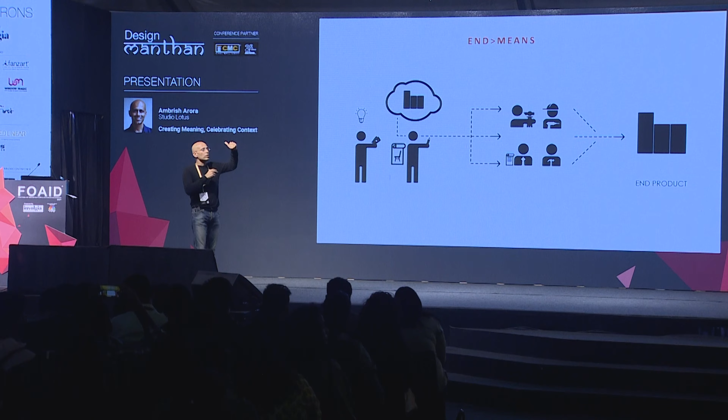I mean, that's what we are taught, and that's the idea of modernism or postmodernism. But if we really want to harness what we have in this country, we need a process where the means become more important than the end. We always hold ourselves back asking, is the way it will get done appropriate to what we are doing? That brings us to what we call an evolutionary model.

We create a framework, like the one I shared with you, asking what does this project aspire to do, how does it aspire to do it, what is it addressing, and then share that as a value amongst all the stakeholders—whether it's the client funding the project—and infuse it with ecological, cultural, and social values, making sure the end result for the client is addressed in a much richer way, because the knowledge harnessed is not ours alone. It's a collective repository.

So what you are then is not an author of the design, but a facilitator, an orchestrator, making sure that all that immense talent out there is harnessed to deliver what's most appropriate for the project. This results in a project that's much more inclusive, delivering an emotion and a learning that transcends your own—and that itself is a reward you get at the end of it.

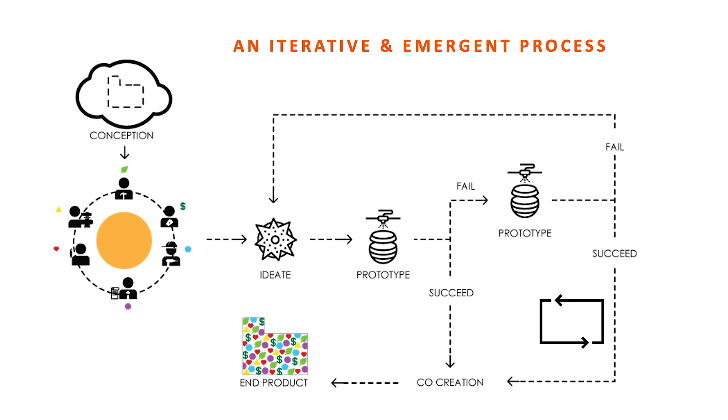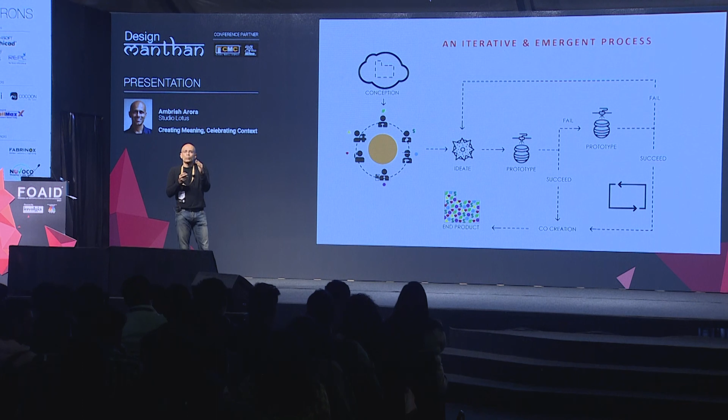And you have to work harder, no question. You have to prototype, ideate, test it, come back. That's one of the things we're struggling with at the studio right now—you get paid the same fee, but how do you include all of this as part of the process? So we have to work twice as hard to get to where we are, but the product at the end is much more rewarding. Hence we look at ourselves as one of many possible change makers in the industry.

I'm going to talk about two case studies. These are projects I've not shared before, and they were also shortlisted for the World Architecture Festival finals. In fact, one of them won the building category just a couple of days ago.

Both of these, oddly enough, have the same set of collaborators. So what I'm really sharing is a collective effort of the structural engineer Manjunath, a brilliant man; Akshay Kaul, the landscape architect, who we worked with for several years; Mangrove Collective, who does furniture for us for both these projects; Buildcraft, the contractor, who took on the challenge of doing something like this because it was extremely challenging; and last but not least, the fantastic set of colleagues I have at the studio.

This first project has been a journey of watching nature heal the land as much as us building a home. Situated between Bhimtal and Mukteshwar in the Kumaon region of Uttarakhand, the site is at a height of 2,000 meters above sea level and rises through an elevation of 400 meters over an incline of 1 kilometer, with slopes varying between 25 to 40 degrees.

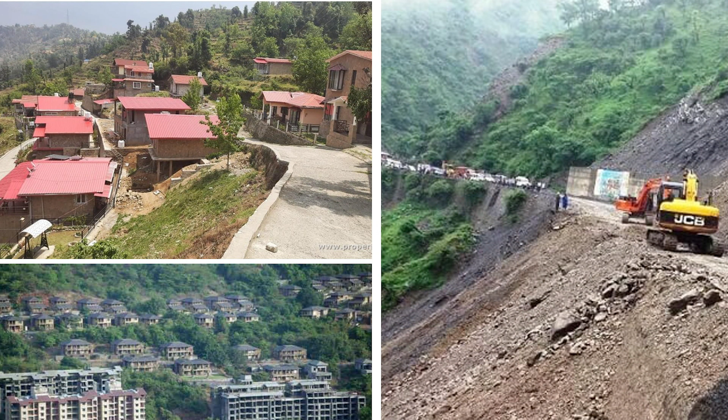We all know a lot of people are now looking for second homes in the hills around Delhi, and this has led to massive, rampant, insensitive construction by private developers—partly because there are no codes in rural areas and because they're looking to make a quick buck. The region has abundant rainfall, but the breakdown of old rainwater catchment systems has led to a scarcity of water, which is true of most parts of the country.

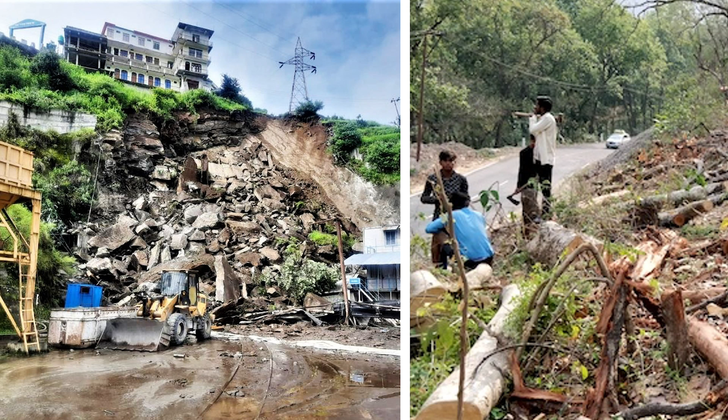Destabilization of slopes and destruction of green cover makes it increasingly prone to landslides, as we've just recently seen in the past few years. So when a client approached us to do a luxury hillside development, we were wary of taking it on.

Initially we pushed back, not sure what he wanted to do. But over several meetings, we found he shared our values and vision. We set out almost like a charter, asking: can we give back to the land as much as we take from it? That sounds oxymoronic since you're building on it, but the land hadn't been taken care of well, and that gave us an opportunity to build in a way that treads lightly on the ground and perhaps even enriches the ecosystem.

For the master planning exercise, we worked closely with Akshay. First we mapped out the slopes and surface drainage patterns, critical on hillsides, the natural flow of water, and the vegetation. At the intersection of these three, we figured out which areas we could build on without impeding any of them. We laid out a network of roads responsive to the terrain, and came up with a master plan of only 70 homes on 88 acres with ground coverage of less than 5%.

How did we make it financially viable? One way was making buyers pay for the common amenities. We developed a community-like approach where many amenities, instead of being built into the homes, were built into common areas. There are no boundary walls; there's free access across the whole 88 acres. So everyone, when they buy a home, experiences buying into the 88-acre experience, and that allows the development to pay for keeping this sparse approach.

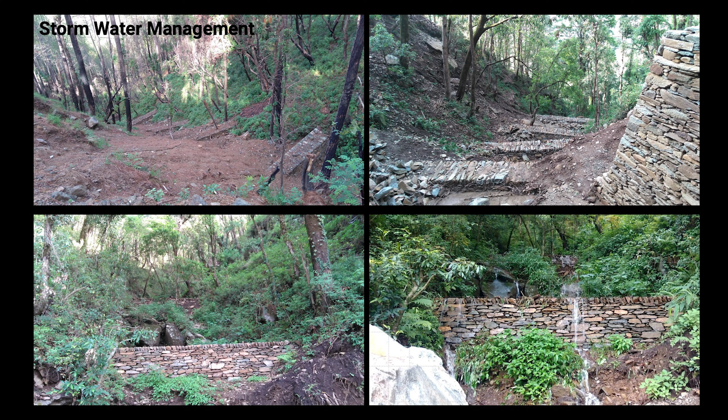We created a goal of being net surplus on water requirements, a first in that region. For the first two years, the client agreed to work only on ecological regeneration of the site. Even before the first house construction started, we worked on reducing surface runoff and minimizing soil erosion through a network of check dams and gully plugs, all dry stone, no cement used. More than 300 of these have been finished so far. Within just three seasons of rainfall, water levels in shallow wells on site and in villages downstream have come up more than in the last 20 years. That's been immensely rewarding.

Usually when a developer builds, it disrupts the surrounding rural ecosystem and networks. In this case, the villages have come up and supported this because it's added value to their communities.

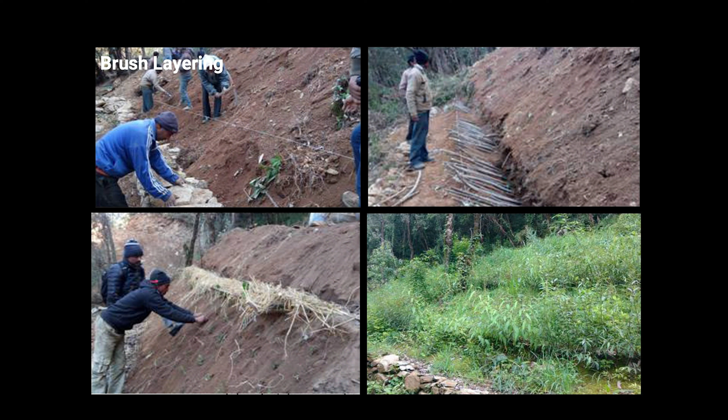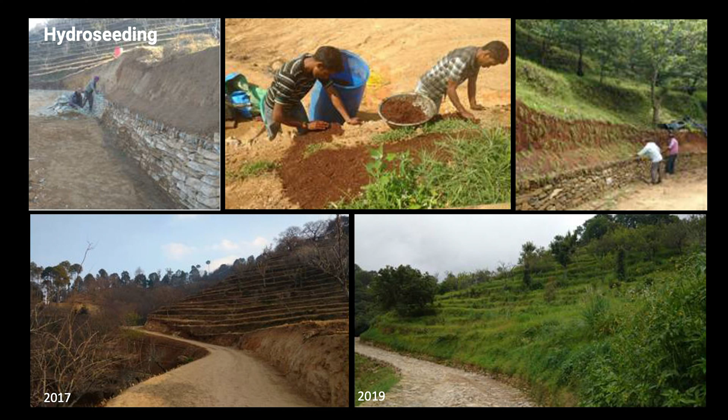To prevent soil erosion and stabilize the site, we moved away from building large concrete retaining walls. With Akshay and Dr. Madhusudan from Nepal, we created bioengineering techniques such as brush layering and hydro seeding. Those are before and after pictures you can see over the two years.

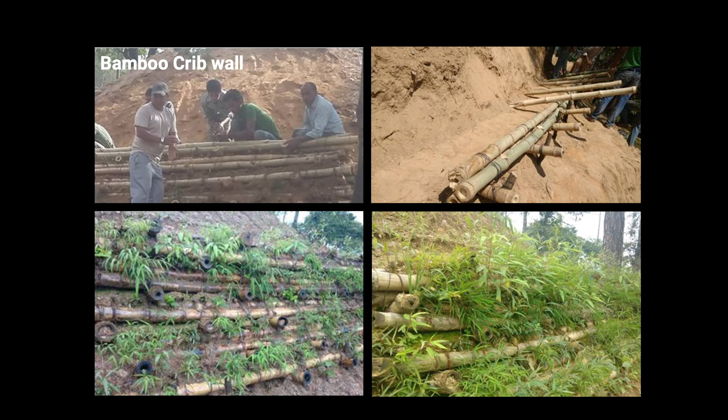We also used bamboo crib walls, where live bamboo is planted along with woven bamboo to generate retaining for the hillside, along with infrastructure and a lot of reforestation—thousands of native trees such as oak and rhododendron, along with native shrubs and trees that don't require irrigation.

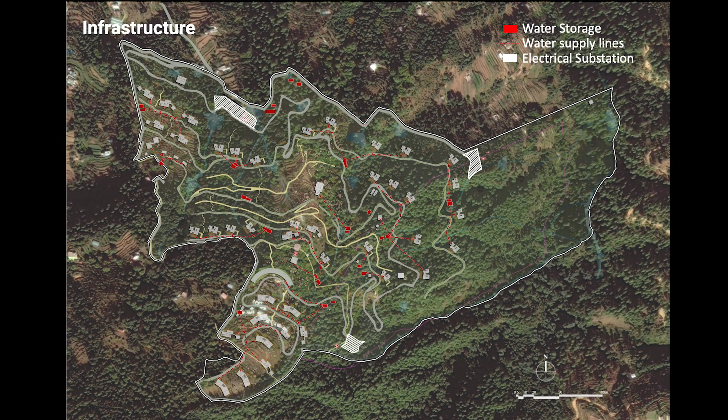Infrastructure is being planned as a distributed hub and spoke network. Rainwater runoff from the roof is collected and supplied through a gravity-fed network, so nobody owns the water—if I collect water in my house, my tank supplies water to your house. We use gravity, and we have about 30 lakh liters of captive rainfall on site at any given point in time. That's what we're designing for.

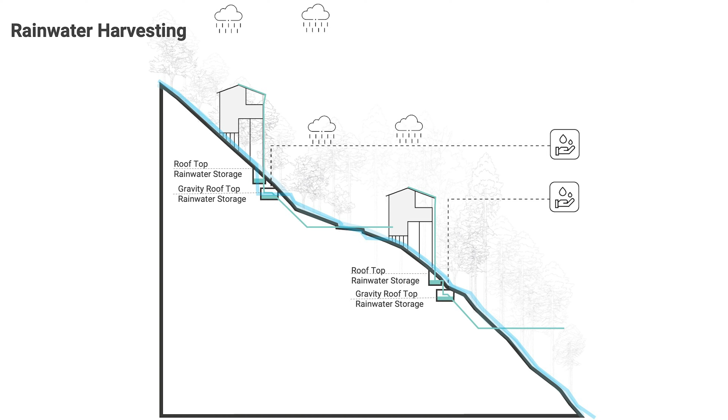The home I'm going to show you now—and of course we've also got biodigesters for 100% of the wastewater to be recycled and reused in a dual plumbing system.

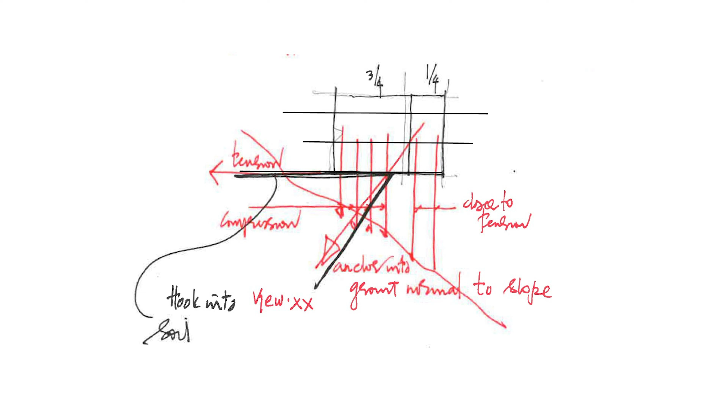The first home was built in a clearing on a slope of 40 degrees, which by traditional methods the local contractor said you couldn't build on. We chose this slope because the more buildable sites in conventional terms were good for farming, orchards, and forest. The framework was conceptualized by the very clever Manjunath. It mimics the structure of trees, with a narrow base that lightens and spreads as it moves up. It's built over 3 levels, a vertical construction to reduce the footprint on the ground, save the trees, maximize views, and the stilts allow water to continue flowing under the house without disrupting the flow.

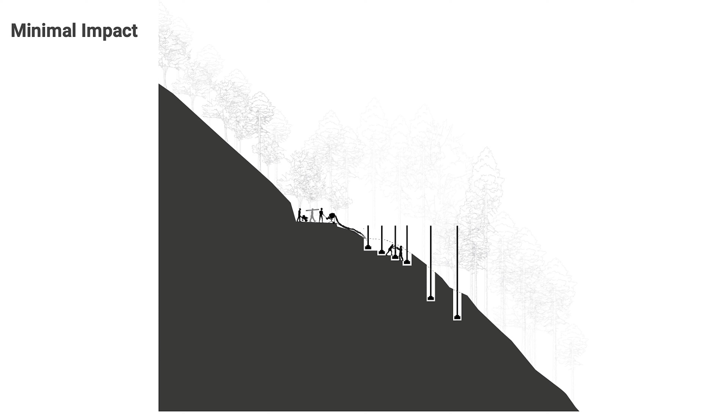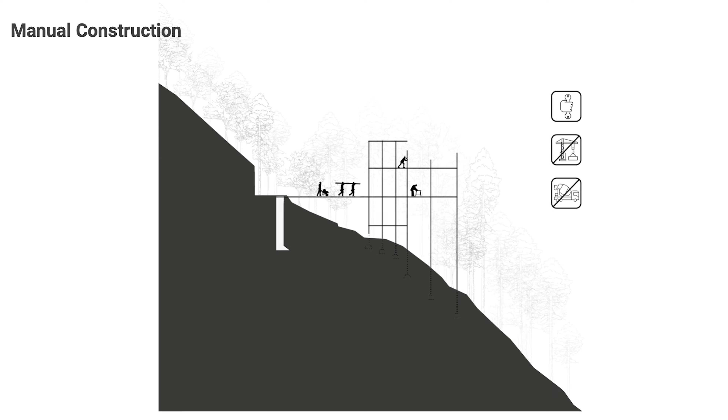Localized stepped foundations along the slope allow for minimal excavation, almost no cut and fill. One of the mandates we set was that we would not bring heavy machinery to site, because setting up a heavy crane and moving girders and material kills the entire site and the trees around.

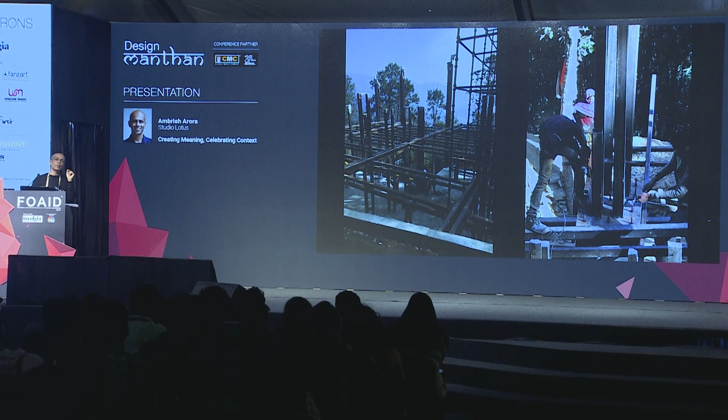So the structure is designed as a basket-like weave of lightweight steel tubes, and each member has been designed so that 3 to 4 people can manually carry it and assemble it. It's like a little Lego block, and you build as you go along, using the deck slabs, which are thin with only 3 inches of concrete, as scaffolding.

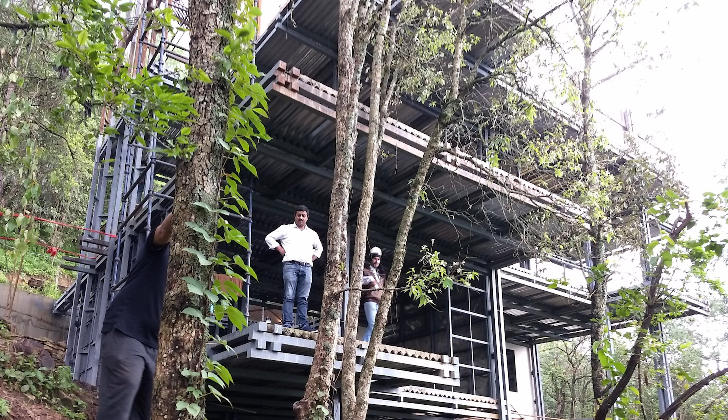The gap in the weave, a woven structure which gives it strength, allows the movement of surfaces and maximizes internal heights. The home is designed to achieve European passive house benchmarks, the first of its kind in the mountains in India.

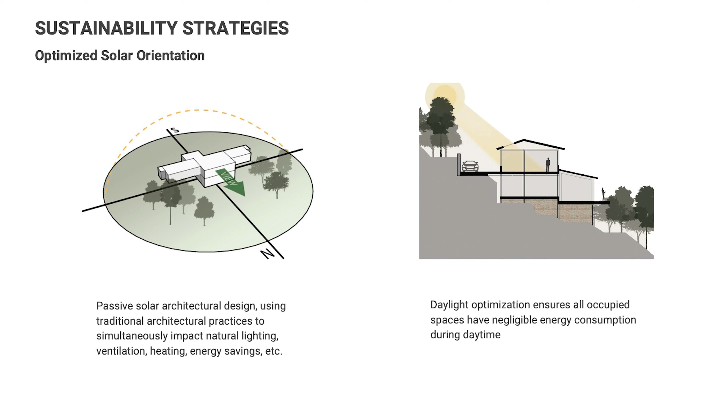Passive design techniques, studies in daylight, solar gain, etc., are obviously there, but the main thing is the construction system, where we moved away from wet work and worked with dry construction techniques with insulated, multi-layered walls, which keep the U values at almost one-third that of stone walls, bringing energy requirements down to less than 50% of a regular old-fashioned stone cottage, reducing heating energy and loads.

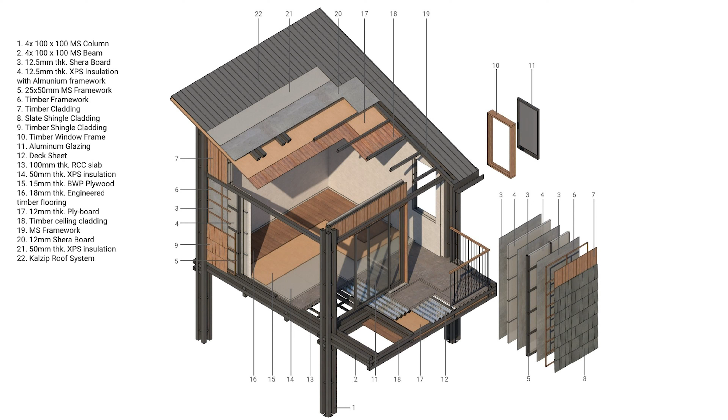The material palette builds on the vocabulary of the Kumaoni vernacular. We have forest certified timber and slate shingles weaving through this metal structure to form an external rain screen.

The interiors combine the client's earlier pieces from his previous home with new pieces that build a regional narrative through textiles. There are some classic pieces he already had, woven together with artworks we commissioned and developed using local artisans, integrating to form an eclectic palette within the relatively contemporary expression of the main house.

This ramped boardwalk leads to the main door. We know wood carving is a popular craft in Kumaoni culture, and local artisans handcrafted the timber frames, doors, and panels inside.

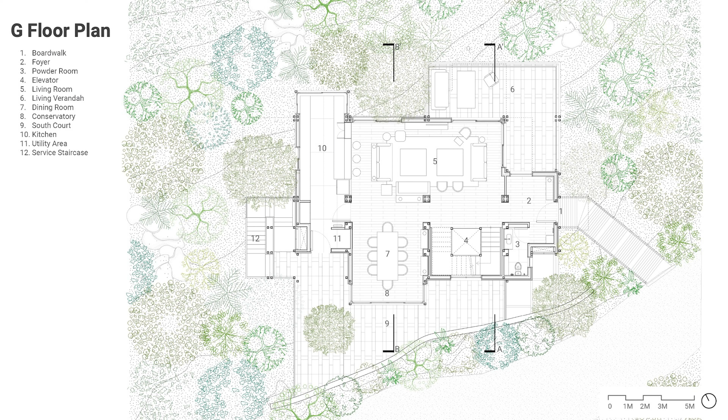The entry level consists of a foyer, a powder room, living and dining with north and south decks. The living room, to the left is the staircase connecting to the upper and lower levels, and the kitchen and utility on the west face are serviced by an independent entry and a service staircase.

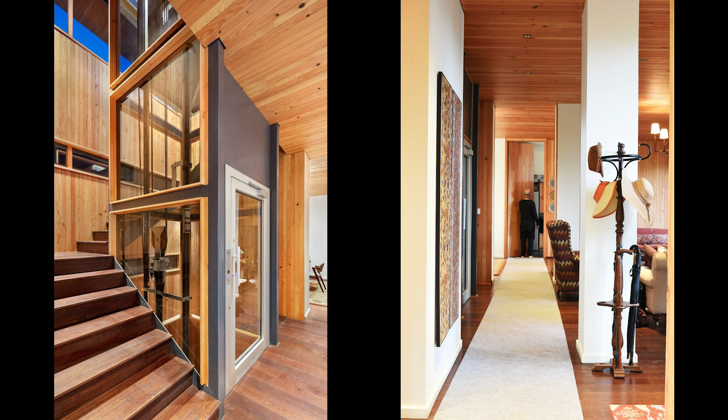What you see here is the foyer that opens up towards the elevator. We've got elevators in the house to ensure universal accessibility, so all the homes have handicapped access, something that's very rare in the hills. We've designed the siting to be such.

That's the living room, which connects to a semi-covered outside deck perched among the trees. The dining area has a conservatory structure towards the south that brings in the south sun and opens up onto the courtyard on the south.

The upper level has a den flanked by two master bedrooms, and the stairs open into this den, which has a fireplace connecting to an open-to-sky deck flanked on either side by bedrooms. Each of these bedrooms have bay windows overlooking the views that project into the forest.

Skylights with retractable blinds in all the rooms bring in the winter sun, and at night capture the intense starlit skies that one doesn't get to see in Delhi at all. The lower level has a guest suite, staff quarters, and a storage area.

The staircase opens up to the guest bedroom, which has its own deck. There's also connection to the beautiful semi-covered landscape, which leads down through a cobbled mountain path to a bamboo deck over one of the springs that has come alive post our ecological restoration.

All the services of the house, such as the MEP room and pumps, are tucked in below the floating south court, easily accessible from the service staircase.

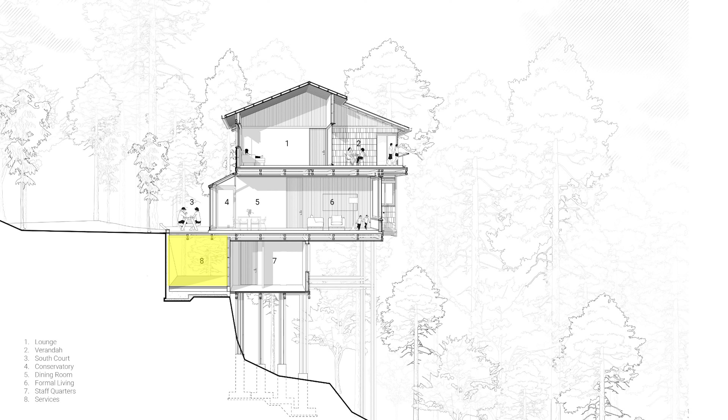The house within the forest evokes a feeling of being perched among the trees. The upper level bedrooms and deck are nestled within the tree cover. The living room at level 0, the guest bedroom at level -1 with verandas nestled within the forest.

The cantilevered projections bring the forest into the room, and the east elevation of the house finds itself gently perched on the slope. The south elevation merges into the landscape, reflecting the original intent of having the house disappear into the forest.

The second project is something we've done for clients we've worked with in the past on a couple of projects. We've been very fortunate to have a partnership with them, which allows us to continue to experiment with what hospitality in the country needs to be.

The site is set between Jaipur and Jodhpur on a dam, an oasis of 600 acres of regenerated forest by the original owners, flanked by a 150-year-old rainwater check dam. This was built by the then ruler as an irrigation reservoir, and for the third generation of his descendants had been running it as a wildlife camp since 2005.

In the 90s, they'd stopped water-intensive farming on the land and allowed it to be overtaken by native trees into a thriving forest, home to hundreds of species of migratory birds and wild animals such as deer and boar, with the occasional leopard sighting.

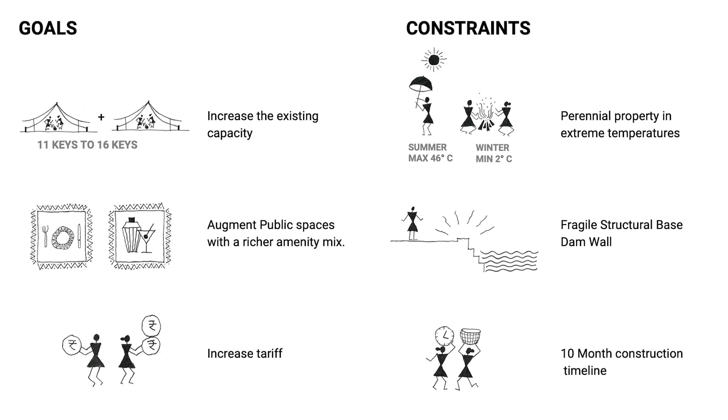Last but not least, the whole project from design to build was about 10 months, because the business plan only allowed them that.

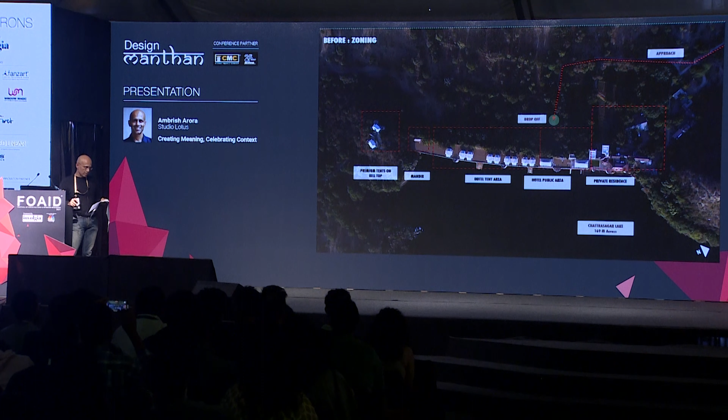The old program had circulation and services already mapped out, and for minimum disruptions, we built on the existing scheme that was there. The old structures had no privacy either from the circulation path on the dam or the open areas in front, and only offered lake views, ignoring the lush sunset forest views, using the dam as a corridor. The services were buried underground and were messy to maintain.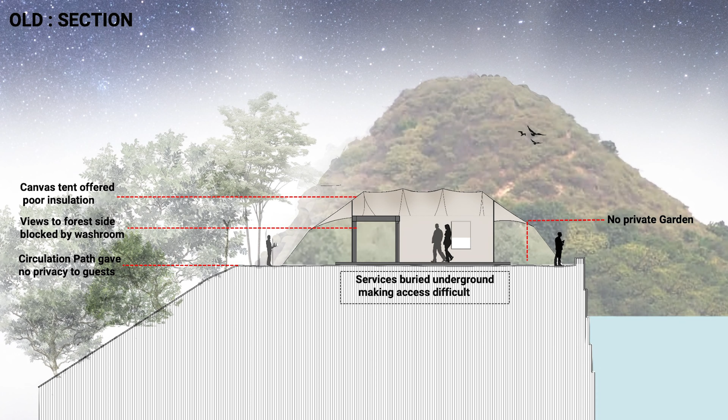Our primary move was to create tent-like, air-conditioned, insulated pods on an elevated lightweight deck with privacy screens segregating them, and a sunken circulation path on the west side facing the forest.

This allowed us to create stronger lines of sight on both sides of the tents and run services off the ground for easy maintenance. A skylight over the bed frames the intense star-studded night skies, heightened by the lack of ambient light in the remote forest.

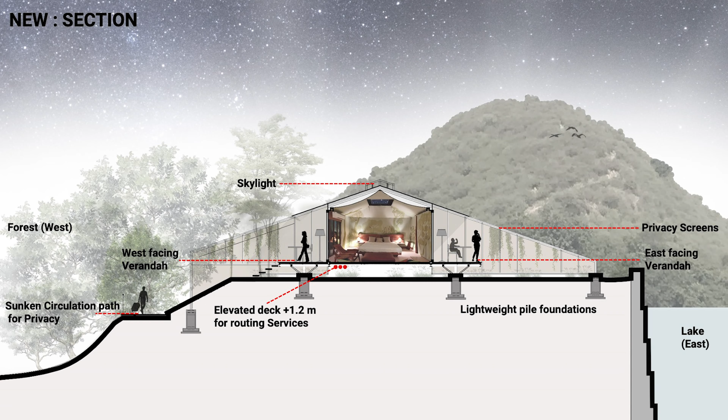The structural system works on shallow isolated piles made from hume pipes rammed with lime and waste stone. Over this, a lightweight custom-built metal structure gets bolted. Infill slabs of local Chittar sandstone form the deck and finish floor in one go, so there's no screeding, no cladding.

A double-skin drywall thermally seals the structure, and an outer covering of heat-reflecting tensile fabric on both the roof and the walls completes both the waterproofing and the tent narrative.

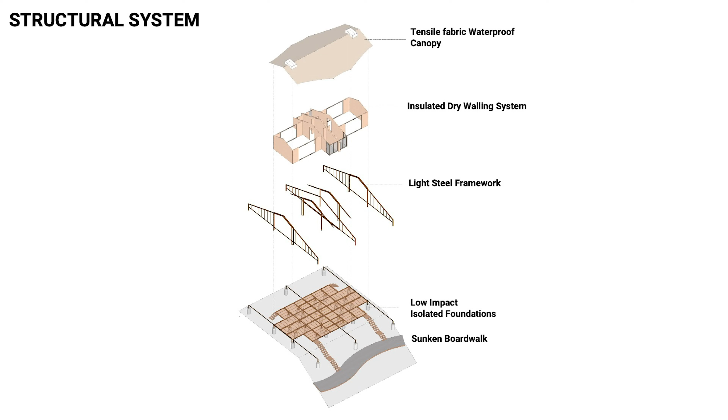The continuous line of structures elevated off the ground allowed us to maximize the number of rooms to 16, increase insulation and privacy, and ease out running all services as a single unit across the whole site without having to excavate the sensitive topsoil of the dam.

Needless to say, all the rainwater is captured and the wastewater is biologically recycled.

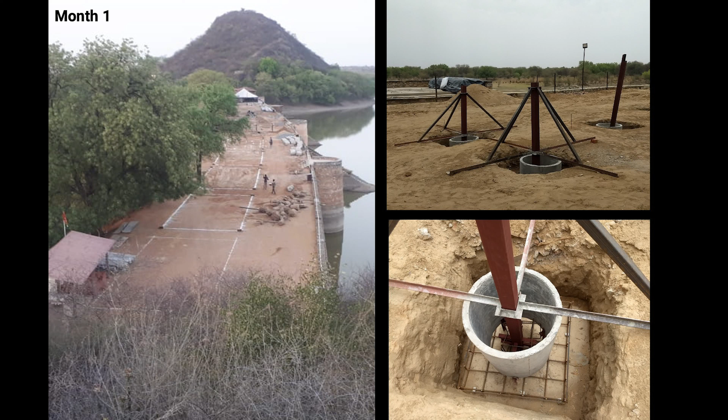So that's the construction process over month 1, month 2, month 3, month 5.

The master plan shows the entrance drop-off at number 2, arrival courtyard at number 5, the old stairs branching off at either the boardwalk leading to the tents at number 8, or further up to the open courtyard leading to the multifunctional restaurant bar that also serves as a reception. There's just one public building, which overlooks the pool and deck at number 7.

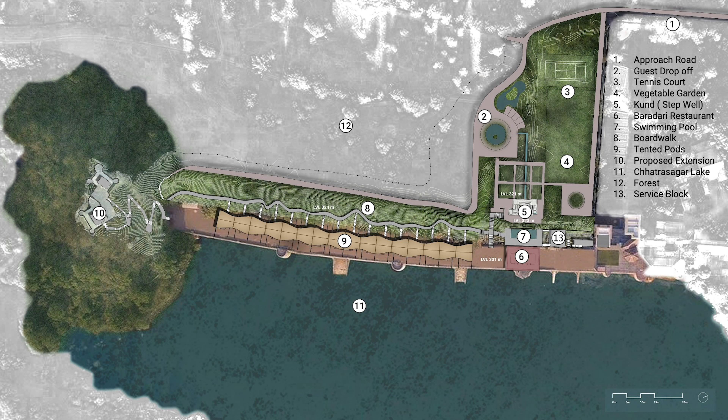Number 13 is the kitchen and back of house services, which overlooks the organic garden at 4 that serves the kitchen and also has an independent service entrance. I'll talk about the guest pods in some detail now.

The plan of the pod strongly extends the indoor-outdoor connect with shaded verandas and open-to-sky gardens on both sides. When the dual sliding timber doors are open, it makes for a seamless connect from sunrise over the lake to sunset over the forest.

This inside-outside connect follows through in the bathrooms, where the linear slivers capture the lake views from the bathtub and the forest views from the toilet.

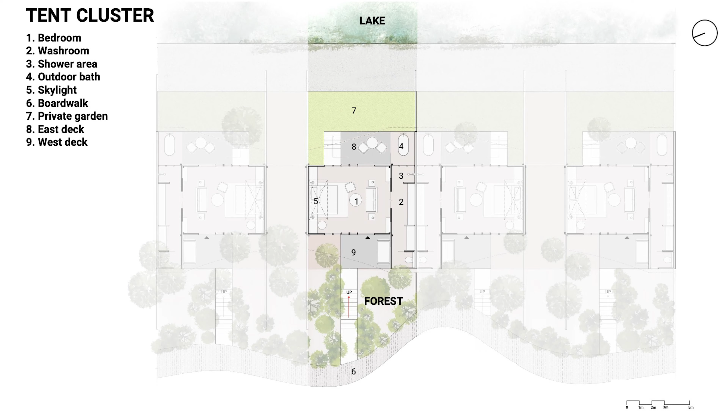The sunken boardwalk leads up to individual stairs that reveal a framed view of the lake.

The interior scheme stays away from traditional Rajasthani heritage cliches and instead chooses to focus on indigenous techniques interpreted in a contemporary way to bridge the forest and wildlife narrative through the idiom of a camping tent.

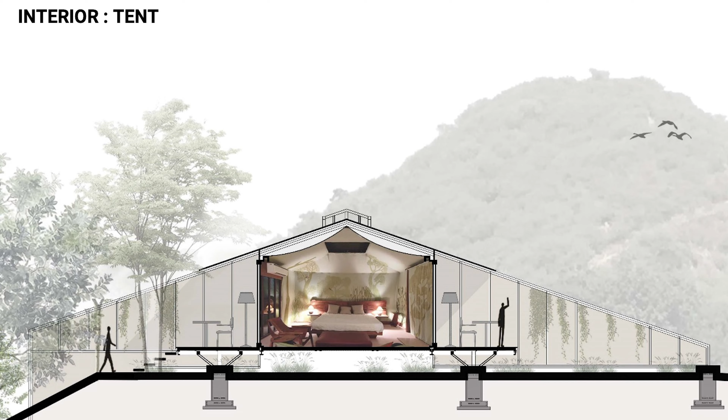We collaborated with Dhvani Behl, a printmaker who works in Delhi, who reinterpreted traditional Rajasthani miniatures and art forms, and created an indigenous flora and fauna story. She took the tradition of small woodblock printing and carved out massive woodblocks to manually print handloom fabrics with these motifs developed from the site.

This is further layered with hand-embroidered birds and animals found on the property. This narrative continues to appear in woodwork details such as these hand-carved air conditioning unit covers.

All the furniture is custom designed and built in local oil-finished acacia, which is kikar, and builds on the romance of the handcrafted details of camping furniture of old.

These organic compositions come together to create a happy surprise waiting to be discovered by guests as they use the space. Each tent is different in composition and colorway to create diverse moods for returning guests.

This is the complete tent framing the forest view, with the skylight over the bed. That's the lake view, the lake-facing veranda, and bathtub.

As you move out, you see the colonnade of private decks from the lake, and you can see how they merge into the datum of this old dam, with the public space framed at the right corner, which I'll talk about next, which we call the Baradari, derived from the traditional 12-pillared columns, 12-pillared pavilions of Rajasthan, which literally translates into a gathering space.

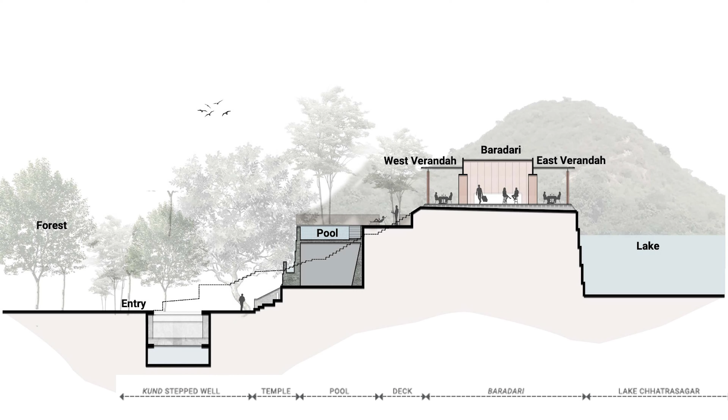The inner space of the building is designed with double doors that fold into the immaculately detailed sandstone fins for 6 months a year, so that the whole building functions like a naturally ventilated pavilion for these 6 months.

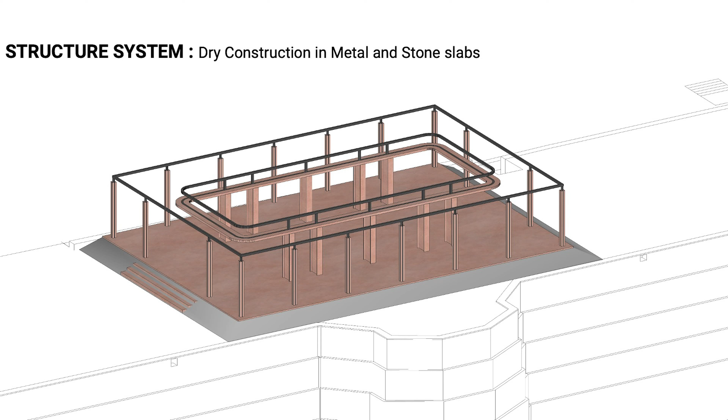This building is made again with dry construction. We got almost no cement to site. That holds 2 slabs, double slabs of 3 meter tall, that means 10 feet tall Chittar sandstone with insulation sandwiched in between. The roof also is made from sandstone slabs with waterproofing and lime mortar sourced from neighboring quarries.

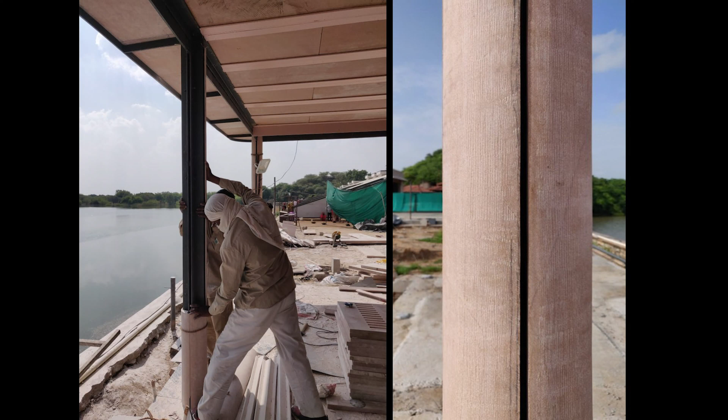All the surfaces within reach of guests are hand-dressed Chittar stone, and all details, including the air conditioning grills, are hand-cut at site by artisans from the region.

Internally, the stone slabs are assembled to create an air conditioning duct that wraps around the interior, while graphically, the interior takes forward the same scheme as we used in the tents, but hand chiseled on stone instead.

The multifunctional buffet island counter, which is also a bar, anchors the space and is hand-etched with flamingos that come to nest by the lake in winter. The west veranda overlooks the sundowner pool deck, the pavilion lighting up over the pool as the sun sets.

This is framed by the reclaimed stone from site for the back of house building that connects below to the entrance experience, a traditional stepwell framing the small ancient shrine that existed at site that houses the deity that guards the dam.

To keep the camp alive and interactive over its lifespan, we built in several elements that need to be maintained by the women of the neighboring village as a daily ritual, such as the clay-lined courtyards, the lime powder rangolis. Even the signages for the rooms are in mud and lime and need to be redone periodically.

I now have a film that captures the experience of being at the camp.